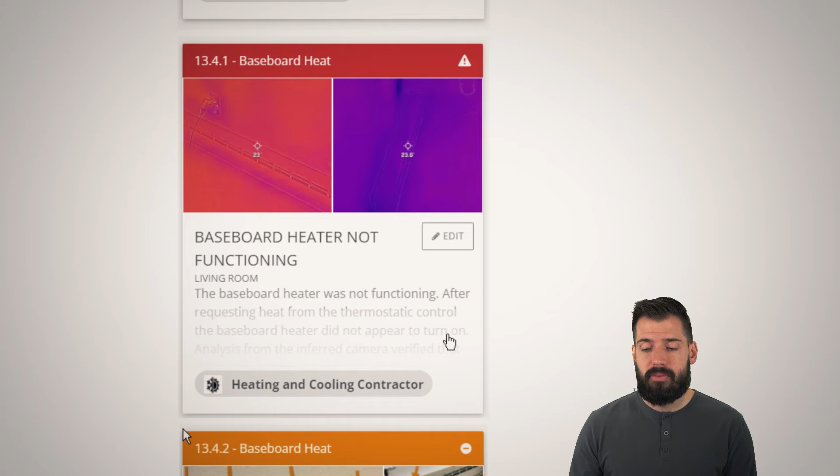Our next one, the baseboard is too hot. You can see some scorch marks right above that baseboard heat. The problem is if a drape came in contact with it, or a bed sheet, it will catch fire. Some of these also show scorching on the wall, and thankfully the wall material is strong enough that it doesn't catch fire, but that's still a risk. Once you start seeing stuff like that, it might be recommended to have somebody come out, professionally evaluate it, make sure it's heating in the right temperature range. Otherwise, get it replaced, because baseboard heaters are very inexpensive and easy to replace.

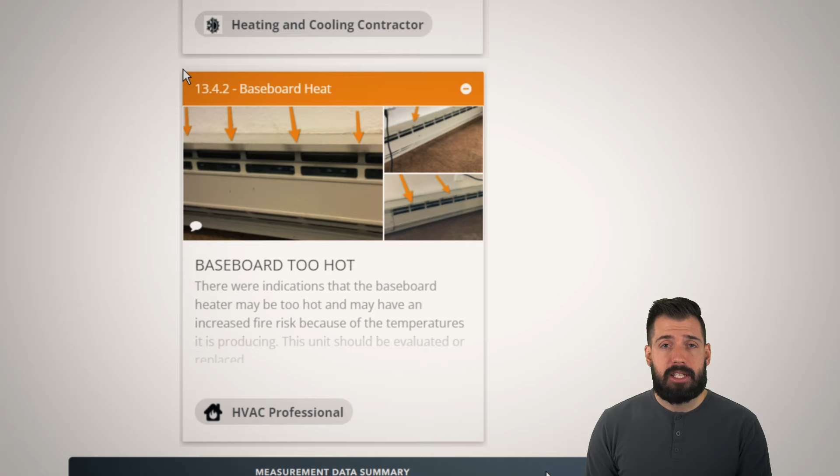The next thing is radon. Make sure you get your house tested for radon. We are in zone 1, the highest level of radon in the entire country, so I highly recommend testing. What you can see is this has an average of 17.4 picocuries per liter. Anything above 2, you should start looking into getting it repaired.

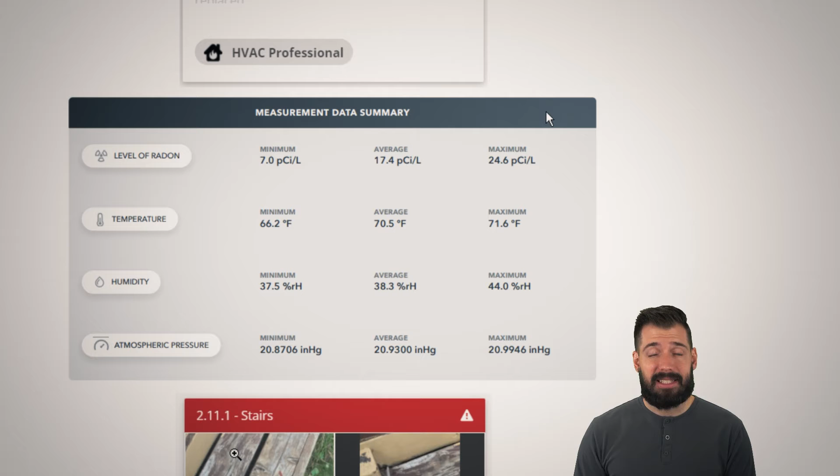Anything above 4, in a real estate transaction, the seller needs to take care of it before you take ownership of the house. This one had a minimum of 7 all the way up to 17 as the average, and then 24.6. That's insane - very, very high and definitely not ideal at all.

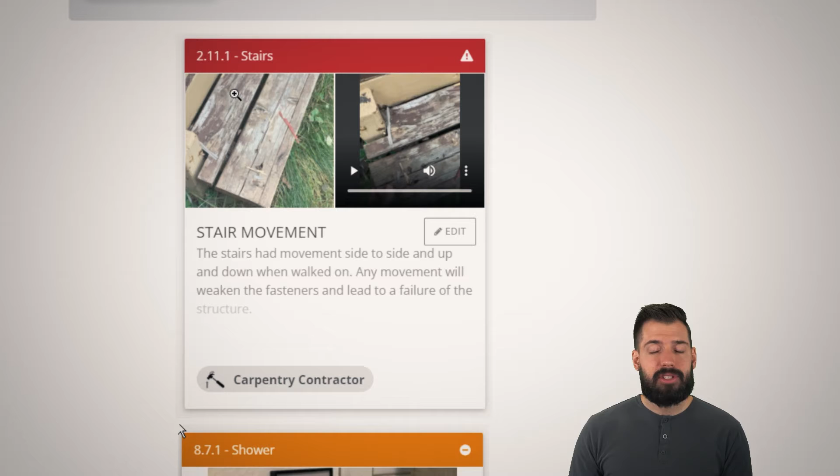So stair movement - great video here, but as you walk on the stairs they just move and do their thing. If there's any kind of movement, the fasteners, like the nails and screws, start moving, and then what they're attached into starts to wear out. Then the fasteners come out and we have some collapse possibilities, some issues.

I always love having notes from the seller - that's about as good as it gets. Hot and cold water reversed in the shower. Is that an easy fix? No, not at all. You'd have to tear out the wall and put the pipes on the opposite sides, and that's probably going to be solid copper. It's just not something that's easily fixed or replaced.

They had to put that sign there because if it's predictable, it's preventable. That means if it's predictable that somebody would go in thinking they have cold and actually put on hot, and they scald themselves or get hurt in some way, then you could find yourself liable, and we definitely don't want something like that to happen. So anyway, it's always fun when we get notes from the sellers, because I love it - they aren't trying to hide anything.

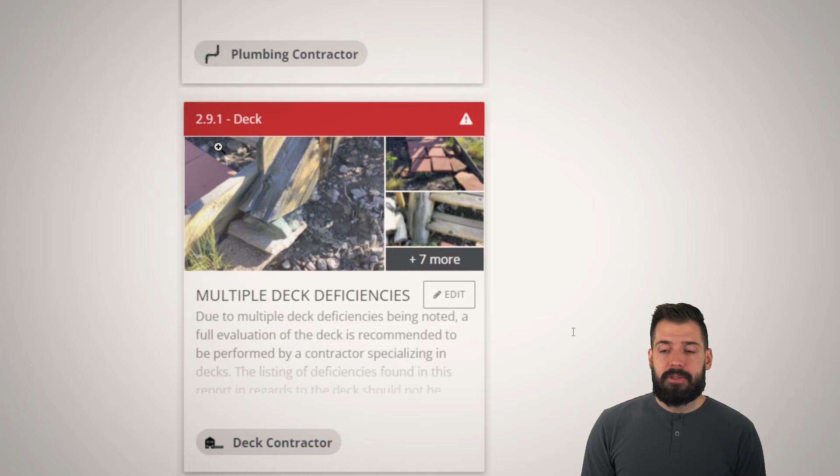They're very clear that, hey, this is an issue, and I like that. I really enjoy that level of integrity. So multiple deck deficiencies - yeah, there were some deck deficiencies here.

It's so interesting, decks are one of those things that people feel like, well, this is simple construction, this is something I could do myself. And the reality is you can't. A lot of times there are so many small details that are missed, and they just add up to have some really catastrophic type issues.

So we have inadequate anchoring on this. We have a whole bunch of issues with the stairs not being the way they should - no railings, no guardrails, no nothing. And it just compiles and compiles and compiles, and then we end up having some major issues, whether it be structural or from a safety standpoint.

And this has both. So if you are going to install pavers, let me just tell you, this is not how you install pavers. A lot of times with real estate transactions, people will do things that make the house look better than it actually is. You can see it's just done quickly. I think they went to the local hardware store, bought some pavers, threw it down so it didn't look like a whole bunch of dirt at the bottom of the stairs, but it was done incorrectly, and it shows and creates tripping hazards.

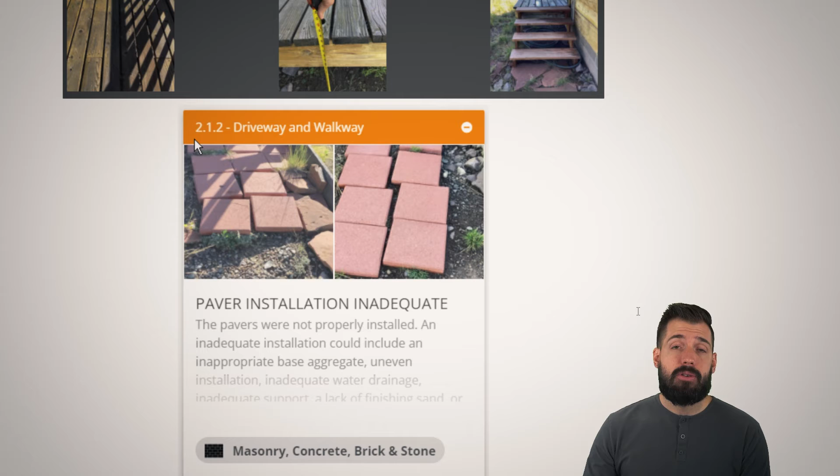So just so you're aware, the protectant is failing on this wall. And the thing about the protectant failing is, does it need a protectant? The answer is always going to be yes. This wood is an organic compound - it wants to break down, it wants to turn to dirt.

If we can put a clear coat on there or some type of stain, that would be excellent. If you want to paint the house, that's great, but paint is not going to last that long. Maybe you can get somewhere from 5 to 8 years with a stain, maybe 10 to 12 years with paint. But the problem with paint is that it doesn't last forever - you're going to have to repaint, and you've lost all of the wood grain, which makes this a beautiful house. So clear coat or some type of stain is exactly what you want, but you'll be replacing it rather frequently.

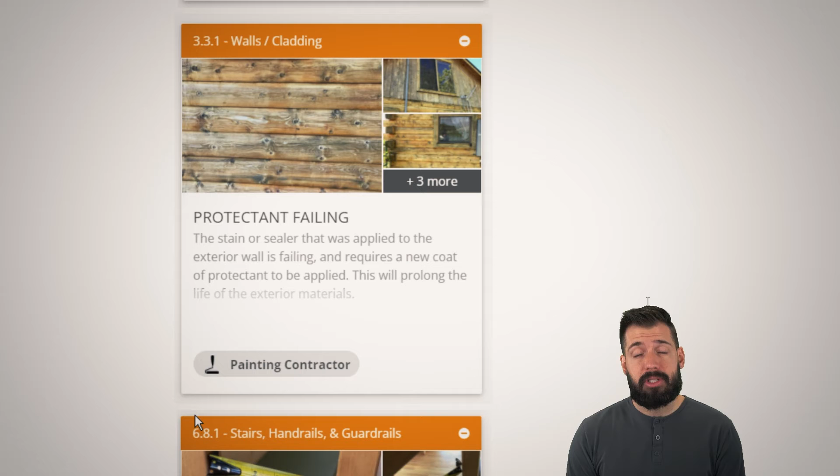Next, we have stairs where there's more than 4 inches of space between the balusters. The problem with this is you have to keep in mind, if there's a child in the house - put yourself in the mind of a 90-year-old version of yourself and a 6-year-old version of yourself, maybe even younger - if you're crawling around, is there the possibility that a baby could fall through that? And the answer is yes.

So we always want to make sure that we are being as safe as possible. The reason these standards exist is because people have gotten hurt in the past. And again, if it's predictable, it's preventable.

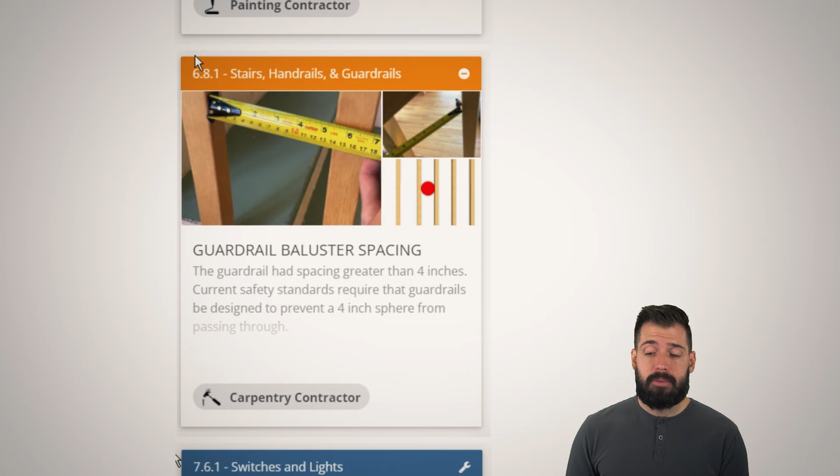Moving on, it's really interesting whenever there are light switches that are taped over, because you have to ask, why is it taped over? Is it a convenience thing, maybe they have their TV hooked into a wall outlet around the perimeter of the floor? Do they have some other device running off this, and why does this have to stay on? Is that a wiring deficiency, or is it just because they have baseboard things plugged in like computers and they don't want to accidentally flip the switch and turn off a computer, which would turn off some outlets around the bottom of the floor? Maybe that's what they have going on.

So the next thing is, this house has a 100 amp service panel. Right now, the average is about a 200 amp service, and a lot of homes are moving into 400 amp service. When you think about all the electronics we have today compared to 50, 60 years ago, there's nothing in comparison. The amount of electricity needed from the average home has just expanded crazy. So a 100 amp service really isn't enough for a 4-person family - mom, dad, parents, children - that's something we definitely want to have whenever there are 4 people in the household.

We definitely want to have 200 amps. Think of it as 50 amps per person as a safe bet. If you're a person that does a lot with electronics, there's a lot more TVs, gaming consoles, computers, tablets, then maybe you need more power. Or if you do something in your garage like welding, then yeah, you probably need more power. But whenever we see 100 amps, that's really the bare minimum of what you could possibly have and still be happy in your house as far as electricity load is concerned.

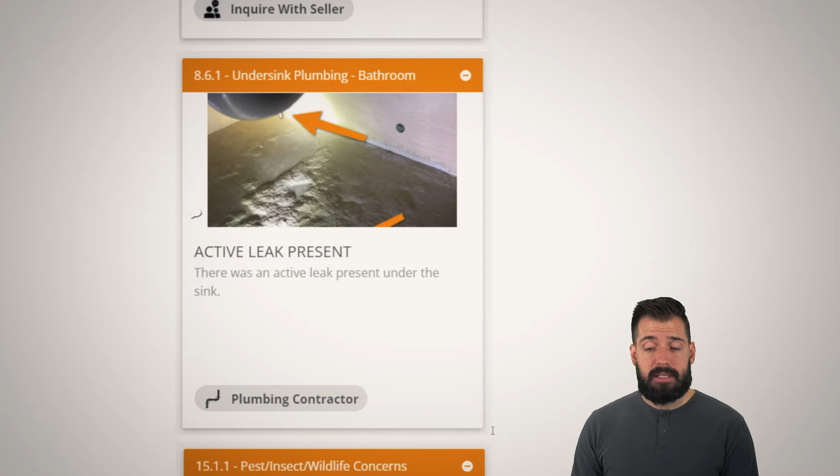So in this case, the leak is coming because there are two little things that need to be tightened, and unfortunately people don't always tighten down their plumbing the way they should. This can be tightened without any tools, just by hand. But clearly the issue is there, and either it was ignored, neglected, or they just didn't know how to fix it. But it's as simple as this: if you can tighten down the cap on a drink, then you can tighten down that.

So, rodent droppings. Whenever there are mice or other things like that, you have to keep in mind that whenever a mouse is scurrying across the ground, they are constantly dripping a little bit of urine, and that is actually how they leave a scent trail to tell them how to get back home. So anywhere there's a mouse, there's mouse urine on the floor, so that's gross. And then additionally, we have all of the rodent droppings, all the poop.

The problem with that is the rodent droppings can have a virus called hantavirus, and hantavirus has a 40% kill rate. So basically, if it's between you and 3 friends that got hantavirus, probably one of your friends is going to die. And realistically, it is a very, very dangerous thing. So if you do see rodent droppings, eliminate the mice first. Once that's taken care of, then you can clean up all the rodent droppings. Just wear a really good respirator to make sure you don't have any issues with the hantavirus.

So Federal Pacific electric panels. We've said it a million times: if you have one, get rid of it. Spend the $2,000, get a new electric panel, get something that has AFCI and GFCI. AFCI is arc fault circuit interrupter. GFCI is a ground fault circuit interrupter.

AFCI, if there is a wire that is nicked and the electricity is just arcing, then it is going to shut that off. GFCI is if I touch something and now the electricity is going through me instead of going through something else, then it'll shut off. We can have our service panels have both AFCI and GFCI, and that is ideal.

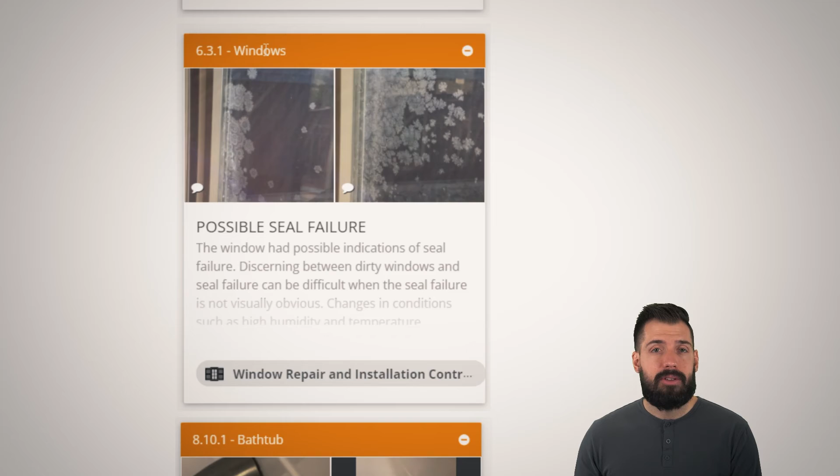Now, if air can move in and out, then so can moisture, and whenever that happens, we get something that looks just like this. And those windows functionally are not going to keep heat inside the house the way they should. Additionally, it's very difficult to look at the beautiful mountain vistas whenever you have a window that you can't even look through.

So, fill spout loose. The problem with the fill spout being loose is that you have to keep in mind that the shower or whatever is waterproof. So water comes down, hits the shower wall, and it's waterproof. Great. But in order for us to get water in there, we have to have something coming basically through the wall, so we have a pipe coming through the wall. Now we have a way for water to come down, hit the pipe, go through the wall, and now we have water in the back of the wall, which is going to create mold and a whole bunch of other issues. So what we want to do is just seal right above there and make sure we don't have any water going there.

Now, one of the things you want to keep in mind is that you don't want to necessarily seal all the way around. You might want to just seal 90% and leave an opening at the bottom. The reason why is if water does get behind there, maybe we still want that water to come out instead of being trapped. So something to think about there.

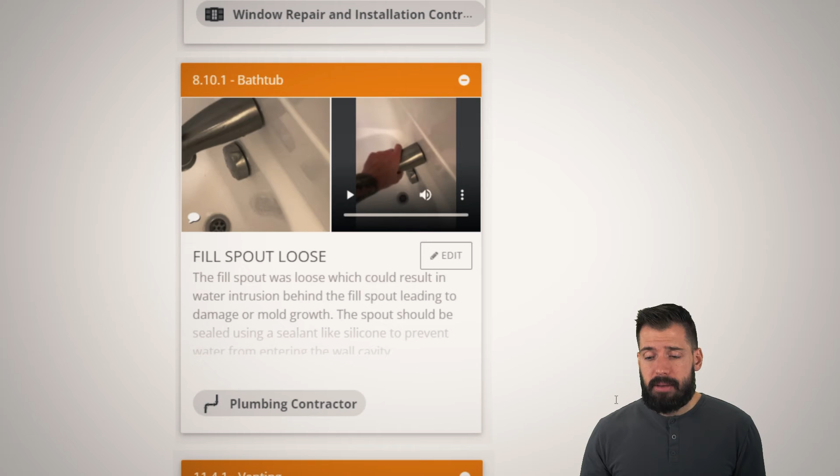Then we have the flue vent taped here. The problem with this being taped is that that's incorrect. Additionally, why is it being taped? Could that be a combustible material? Maybe, maybe not. But the real thing is that if it needs to be taped, then you're using the wrong type of ductwork. That's a good way to think about it.

Or does that mean that maybe it was too long of a run, they had something clogging it, and they were getting backdrafts, or they were getting some kind of gases, carbon monoxide, or byproducts of the combustion process coming back into the house? Or is it that it's so corroded because of incomplete combustion that they then taped it up so they could hide it from us? There's a lot of reasons why people do the things that they do.

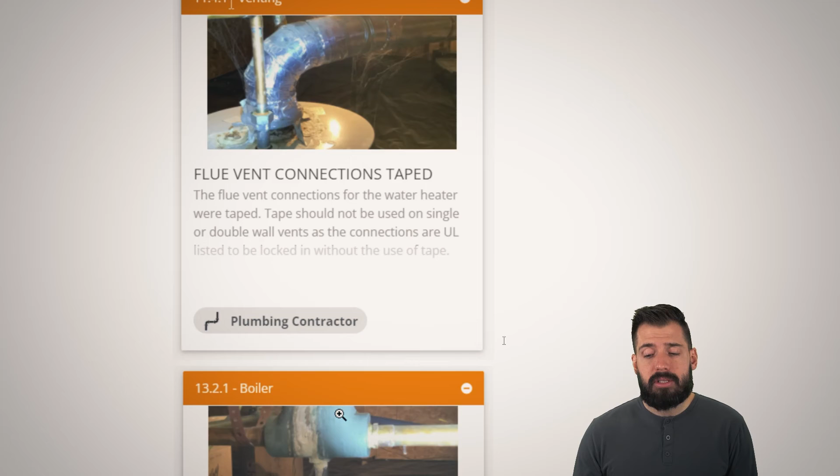So this right here, there's some valve corrosion. What really happened here, if you take a look, is that for a boiler, as water comes through, there's basically like a scrubber, a mesh, and water will come through, and any little air bubbles are going to hit into this mesh and then come up to the top. Then this valve here allows air to be released, but doesn't allow water to be released. So then to get rid of air bubbles, as water passes past this, it is then going to scrub out the air bubbles and release it.

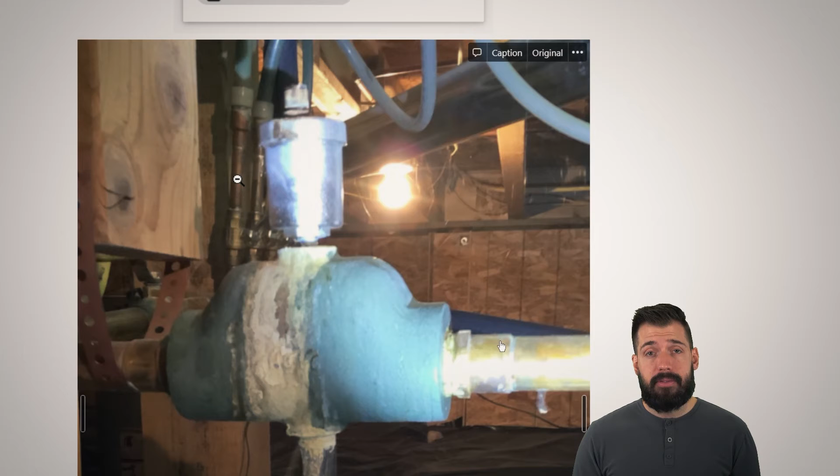Now, if that valve has failed or gone bad, then you start to see something just like this. All they should have to do is replace the valve at the top. It's a relatively easy thing, except this system is under pressure, so we have to relieve the pressure before we're able to work on it. And sometimes that is above the abilities of a novice homeowner.

So then we have gutters and downspouts that are clogged. We want that water to go all the way away from the house. A lot of times we will have chipmunks and other rodents that will fill up those pipes with nesting material, and then your drains from your gutters are completely useless. Absolutely 100% completely useless. So we want to clean that out, get that taken care of.

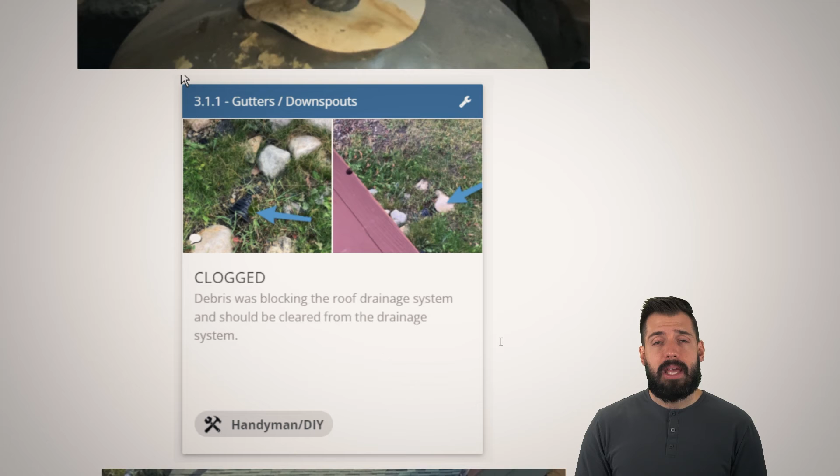Additionally, in our area, in a high alpine environment, if your house is using heat tape to melt that snow and ice off, then you want that heat tape to go all the way down and all the way out, maybe even extend a foot or two outside of this pipe to make sure that any water that goes down that gutter has a clear path to get out of there. Otherwise, the freeze-thaw is going to expand and it's going to break that pipe. When we take a look here, it looks like we have some heat tape doing what it does, and that goes to show that this particular house has heat tape.

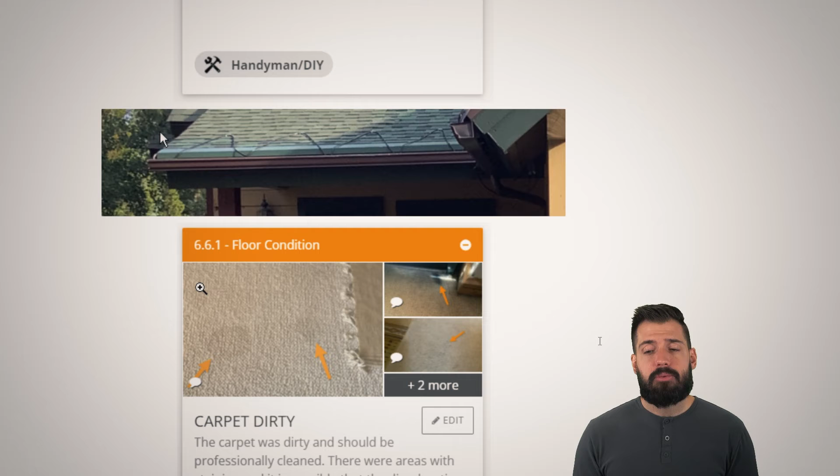So we need to have heat tape going down the gutters.

So the carpet is dirty. Yeah, that's a thing, who cares? Well, if you're buying the house sight unseen, you've never seen it, and you don't know if the carpet's dirty. I guarantee you all those beautiful realtor photos showing the best angles aren't showing you the dirty stained carpets. And if they are, they're upping the exposure so everything looks blown out, white, and extra clean, and that might not be the case. If you have certain allergies or other issues, you might have to replace the entire carpet, and that's obviously an expense.

So we want you to be aware of some of the expenses that exist. Weather stripping damage - remember we talked about mice scurrying across the floor, leaving little droplets of urine so they know how to get back to where they came from? Well, how do you think they get into the house? Whenever there are gaps between the garage door and the ground, or gaps between doors, you need to watch some YouTube videos to see what a mouse can squeeze through. It's so impressive - mice can come in through that type of opening. If you can see daylight, you can see a mouse. It's as simple as that.

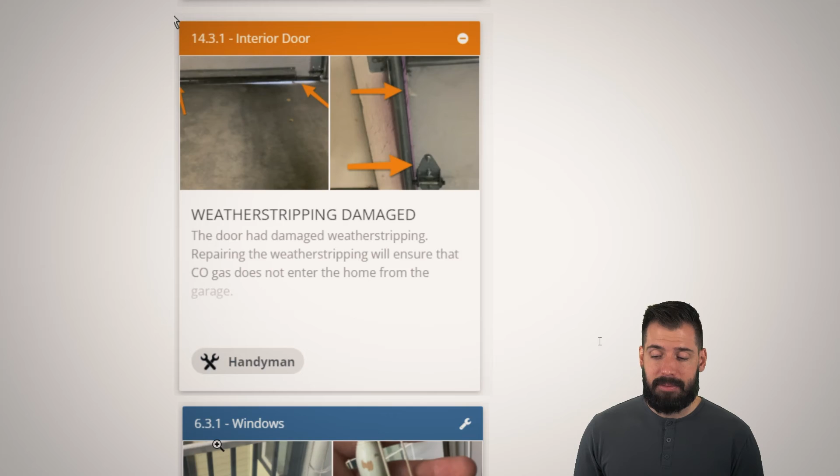All right, blinds are damaged. Sometimes the blinds match all the other blinds in the house or room, and that means just because one blind is damaged, you might actually have to replace multiple blinds - 4, 5, even 10 blinds. If that's the case, to make everything match, it becomes a huge expense.

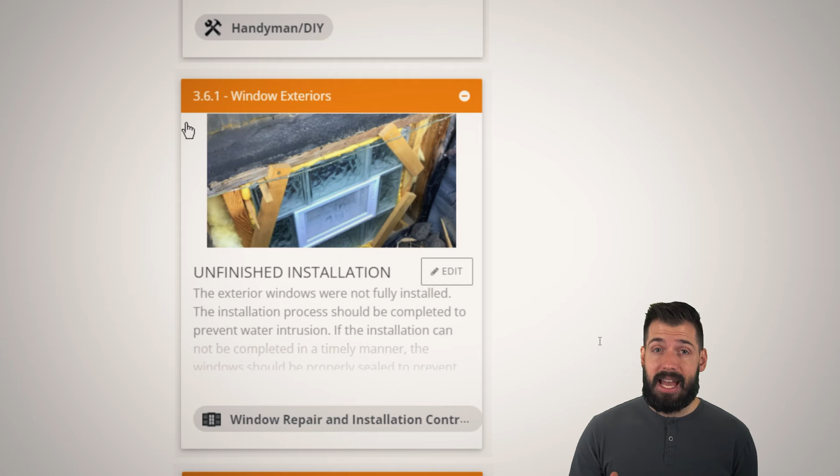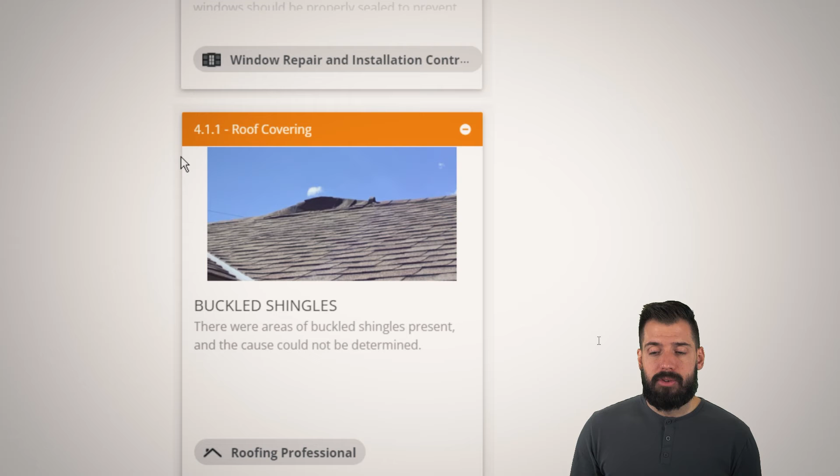So these shingles here, they're done. This could have been from high wind or a whole bunch of other things, but I believe it was high wind, and it just started to rip the shingles off the roof. The shingles were improperly installed to begin with, and that led to issues like this.

All right, installation inadequate. If you take a look here, you have to think of the outside of your house as a rain jacket. And if you just had a big hole right here exposing the studs to rain and other elements, then of course the rain jacket isn't going to do its job at all. Any hole, any issue needs to be taken care of and resolved. In this particular case, it's just poor craftsmanship, and you wouldn't believe how much we end up seeing something like that.

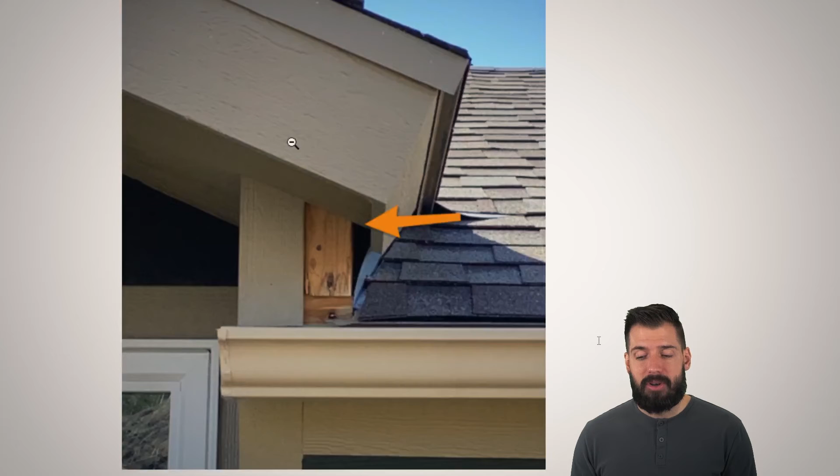So here's a close-up picture right here. If you were a bird making a nest, a squirrel, a chipmunk, even raccoons can fit inside of there - you just found yourself a beautiful, nice home. And if you're a rain droplet, you're probably going to go inside the house as well. You can see some of the water staining on that 2x4 stud, so there's already been moisture-related issues with this - less than ideal.

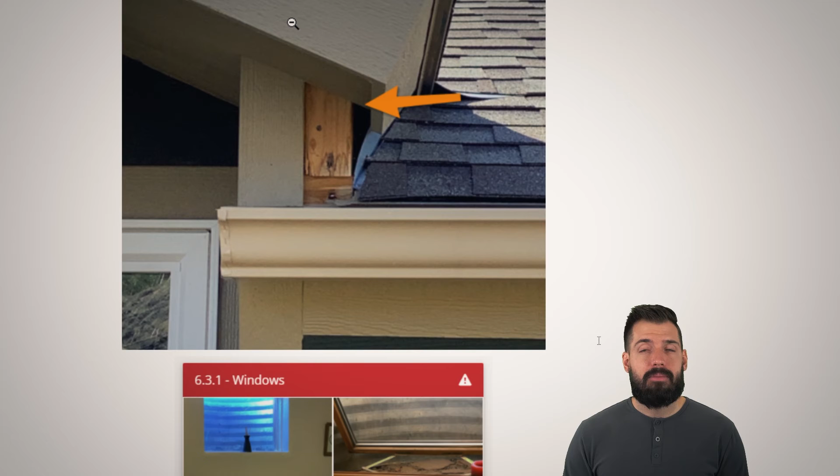All right, here's the thing - I'm not going to get on a soapbox, I promise, I'm going to try really hard not to. But here's what really upsets me: you call it a bedroom, and therefore it needs to have egress, yet you have an egress window that is completely inadequate. Not only is this window too high off the ground, but whenever you open it, there's no way even a child could fit out of that window, because you can't open it any further than it shows.

In addition to not being able to open the window any further, even if you could, you have the metal actuation arms that do this type of maneuver, and they would prevent you from getting out. There's just no safe way to exit from this area. If there was a fire, heaven forbid, this would probably be a room that would claim a life, because not only can you not jump up into that window, but if you can't get out, what are you going to do? Break the window, and then you're going to have bloody hands, arms, and legs, which could be just as dangerous as the fire itself. So something to be mindful of.

The dryer vent termination, not good. You just do not want a dryer vent terminating inside the house. The reason why is because all that moisture on your clothes doesn't just disappear, it goes somewhere. Where does it go? It goes to this vent right here. This vent only catches the lint, it doesn't do anything other than that. So all of that humidity and moisture goes into your house. Now think about how wet your clothes are. Would you ever take your clothes that wet and put them inside a closet? No. Why not? Because it would create mold.

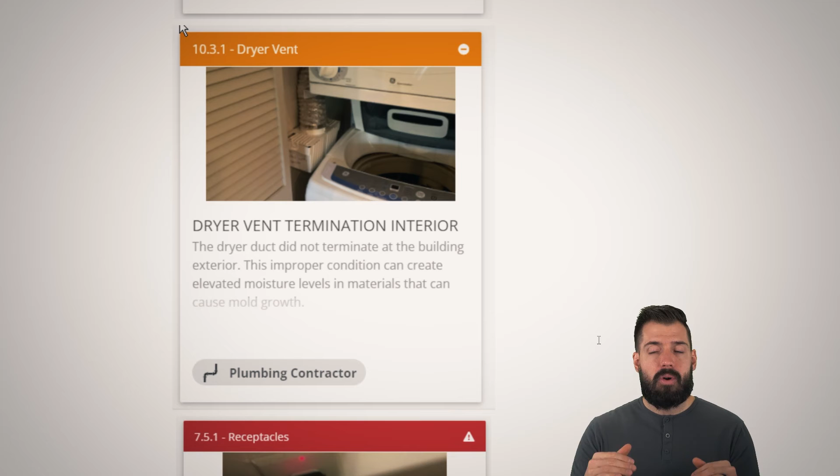That's obviously a very bad thing, especially for people with sensitivities to mold. If you would never take a pile of wet clothes and put it inside a closet, why would you do this? You wouldn't. What they need to do is install a condensing dryer. A condensing dryer, basically just like a dehumidifier, will take all of that moisture and turn it into water that it then drains out. That's what you're looking for.

So, GFCI protection not installed. Again, ground fault circuit interrupter - if I touch something and the electricity comes through me onto the ground, that is bad, but the GFCI should protect me so that I get hurt but not killed. So really any flat surface, anywhere that a liquid could be spilled and come in contact with an electrical device, needs GFCI protection, which in today's standards means basically every single outlet in the house should be GFCI protected. But we're really going to be sticklers about areas like the kitchen, laundry room, and bathroom.

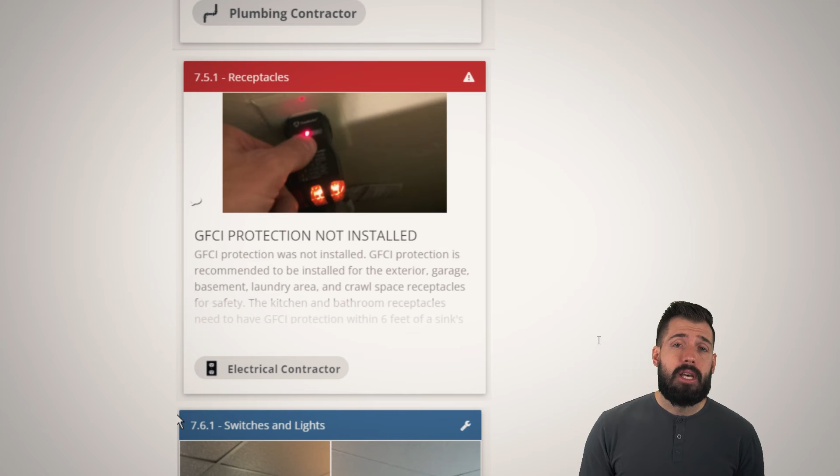Moving on, we have dark rooms. This is something that Shay really points out a lot, and I really appreciate it. The reason he points out these dark rooms is because they were installed with no overhead lighting - you'd just need some type of lamp or something like that. Sometimes that can be challenging because maybe the way you want to set up the room, you can't have a lamp, or you can't have as many lamps as you want, or it just doesn't work. So it's good to know that these rooms might need additional lighting.

Now, with this particular drop ceiling, you should be able to install some can lights relatively easily. But it's just one of those things that if you're buying the home, you need to know that if you're going to make this room the way you want, you either need to invest in some lamps or invest in some lights, because this room is not ready to be lived in just yet.

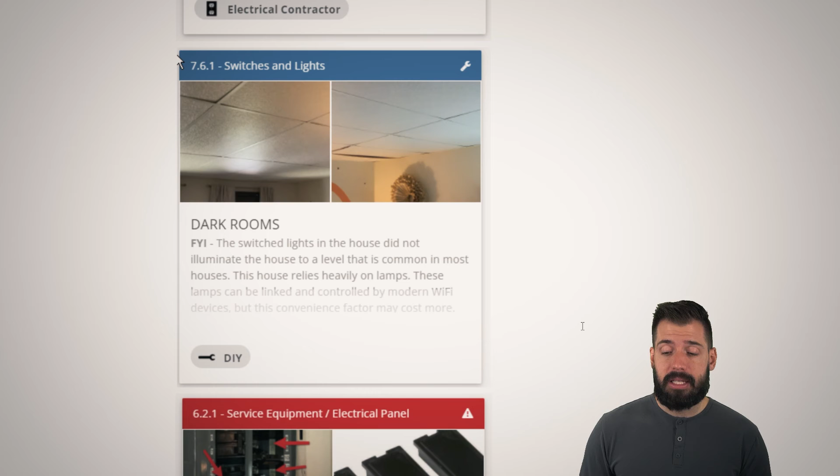All right, we have open breaker slots in the panel. If you can put your finger inside and touch the bus bar - the shiny silver part near the center - by putting your hands into those holes, well, then you're out of luck. That will kill you, and there's no GFCI protection or anything that will be able to help you in that case.

Additionally, on one side you can see that breaker, instead of being put in perfectly, is now sliding down because those filler plates, in addition to preventing you from putting your fingers in there and getting electrocuted, also make sure that all of the circuits stay where they need to be.

So what's wrong if you have a circuit breaker that is like this? Well, the problem is that instead of having a really tight connection, you now have a loose connection, and that can create some arcing back and forth, which creates heat, which then can create a fire. Not a great thing.

This one made me chuckle. I'm pretty sure what they did was cover over top of the vent. There's a vent that allows hot air to come out, and I think they covered it with duct tape. Not the best thing to do. Please don't repair appliances with duct tape. There is an appropriate way to repair it, and if not, just replace it. I no longer think this is able to operate the way it was intended. Here's a nice little close-up of that duct tape.

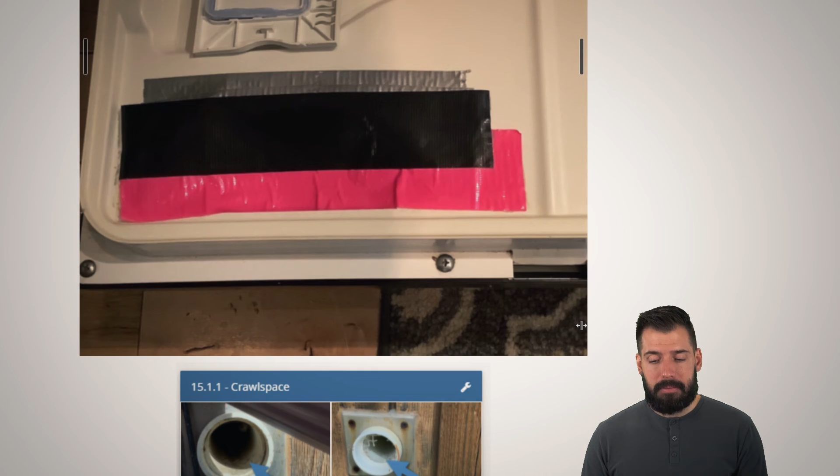All right, so we have screens. What happens with these screens is that you can see in this picture the screen is actually corroded away, and that is a thing that will happen. We need screens on our vents because birds and other animals, insects, whatever, can get inside of those vents. If they get inside, they can clog the vents. If they clog the vents, depending on what the vent is used for, best case it just won't work the way it's supposed to. Worst case, it'll create a backdraft situation where we've filled up our house with dangerous carbon monoxide, which could put our family at risk of death. So we want to make sure we have appropriate covers on these things.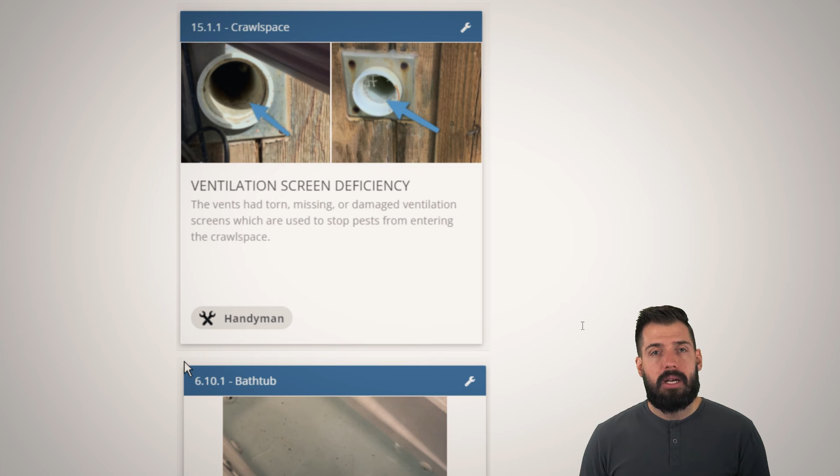Now, one of the things, like a dryer, you don't want to put a mesh screen over top of because it'll catch lint and then clog itself. That needs to be able to breathe a little bit more. So there are cages that go over top of it. Instead of just a vent that covers here, there's a cage that will allow the lint to go where it needs to go, but still prevent chipmunks, mice, and other things like that from getting in there.

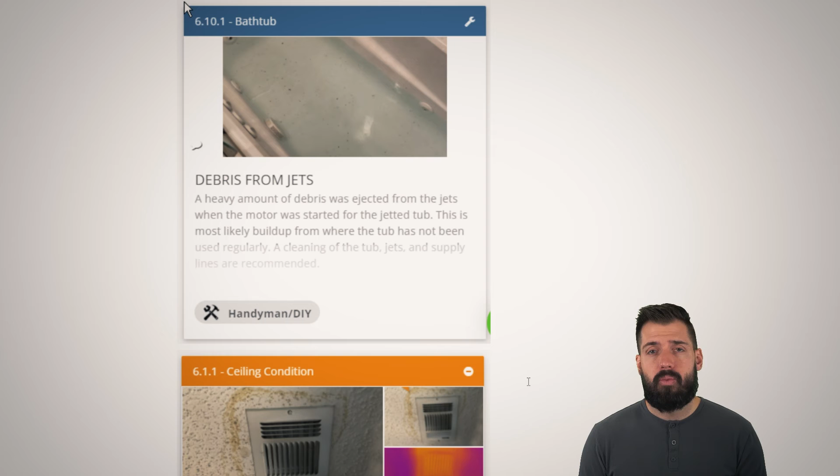So, all right, this jetted bathtub had a whole bunch of debris inside of the jets. That's pretty common and normal. You just want to make sure that once a month you are running your jets, making sure there's nothing in there that shouldn't be. Sometimes, depending on where you live, you might even have insects like spiders making homes inside of your jets. So it's a good idea to run them regularly to make sure you aren't getting buildups of water, scale, soap scum, and other things inside the jets. Especially if you're going to take a bath. If you take a bath, you need to run the jets. If you're just taking a shower, you do not need to run the jets.

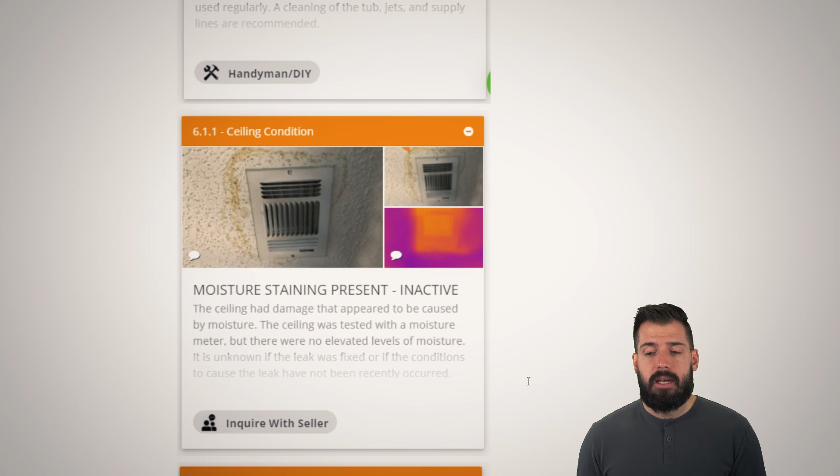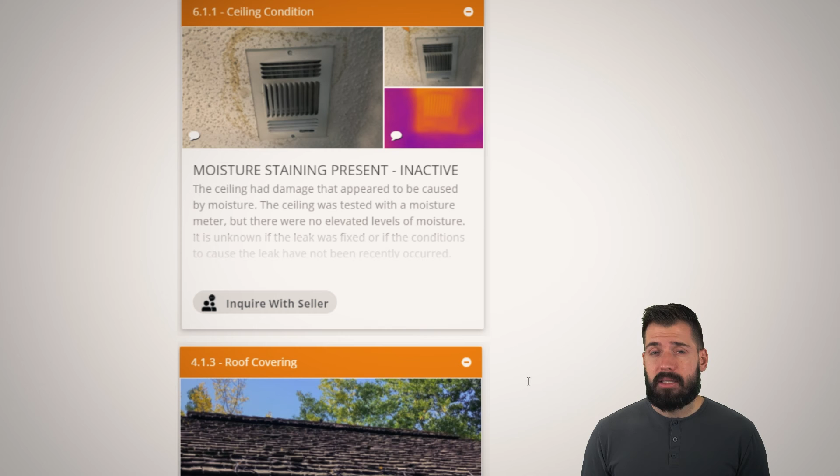So, moisture staining present and inactive. What caused this staining? Is it that we had a whole bunch of hot, humid air coming through here on a cold surface and it created condensation? Maybe. Is it that there was a leak from up above? Probably. But unfortunately, the moisture meter did not detect any additional moisture in that area, and the thermal camera also didn't see anything standing out. So the real question is, when did this happen and why did this happen? And is it going to happen again, or did somebody repair it? That's a very important thing to keep in mind.

All right, wooden shingles, shakes, shingles, depending on how the shingle was made. Most of these houses that have this, it is a huge safety issue. Imagine that we have a wildfire and an ember comes floating over, and that ember lands on top of that wooden roof. That wooden roof is going to catch on fire. If you really love the look of a wooden roof, modern wooden shingles will actually have a fire retardant impregnated inside of the wood, so the wood is not going to catch on fire. That's really what you're looking for. Ideally, you would have wood shingles impregnated with a fire retardant to make them safe. They will last a very long time, and some people really like the look.

There are better, more modern materials, but if that is the look and style you want, just know that there is a modern, safe version of this. Just keep that in mind.

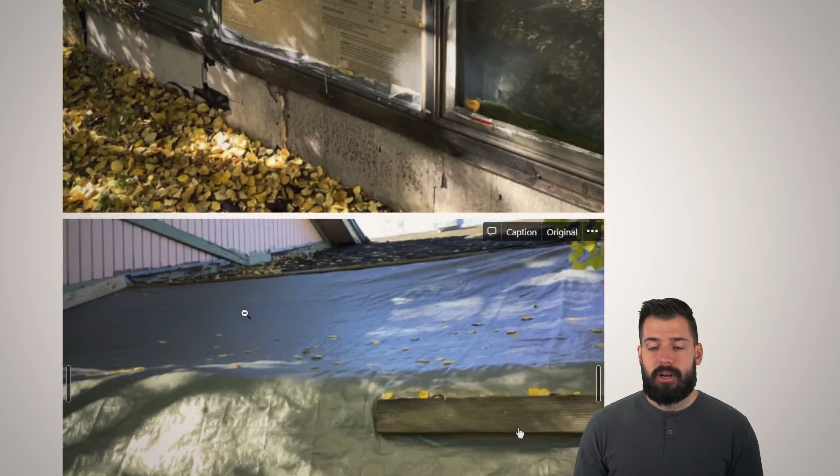So multiple window concerns, there were definitely some multiple window concerns. First off, you can see this tarp is being used, but the way it was installed shows a lack of understanding of how rainwater rolls down things. The window is also missing, so I think it was broken out, and they put some insulation there to temporarily take care of it. Then you see here we have a tarp, and the way they installed it, just terrible, absolutely terrible. So that water is still going to be coming in.

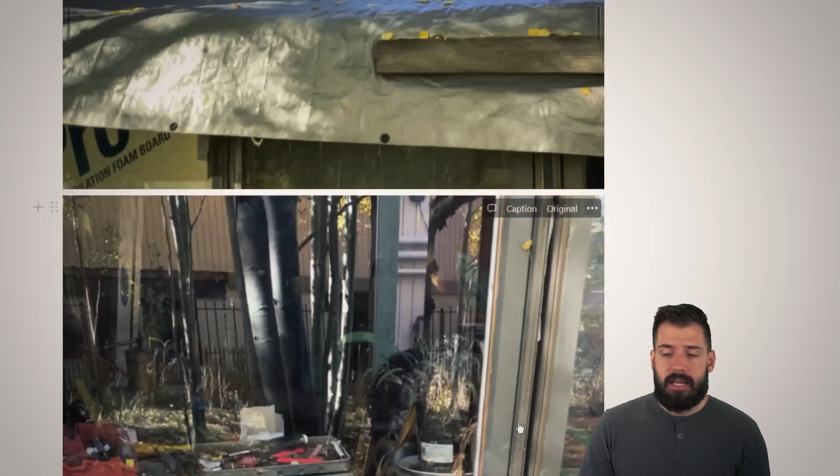Here's another broken window, and you can also see a bit of a settlement crack right down at the footwall of the foundation. Lots of things going on right there. I think all those windows are going to need to be replaced, and I'd also love to have a structural engineer come take a look, because you see the way this is just broken off right here. We have a broken window. Did somebody hit the window? Did something hit it? Or is the issue really more involved with the fact that there's a little settlement in that area, and did that cause the window to break? If that's the case, we definitely want to talk to somebody.

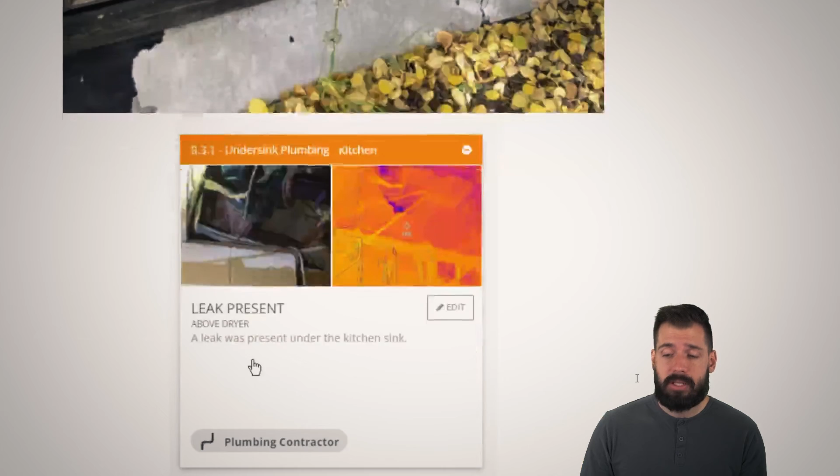Leak present. Above the dryer, there was a leak underneath the kitchen sink, and that's just a bad thing, basically. Thank you, thermal camera, for finding those things, because sometimes you cannot see it.

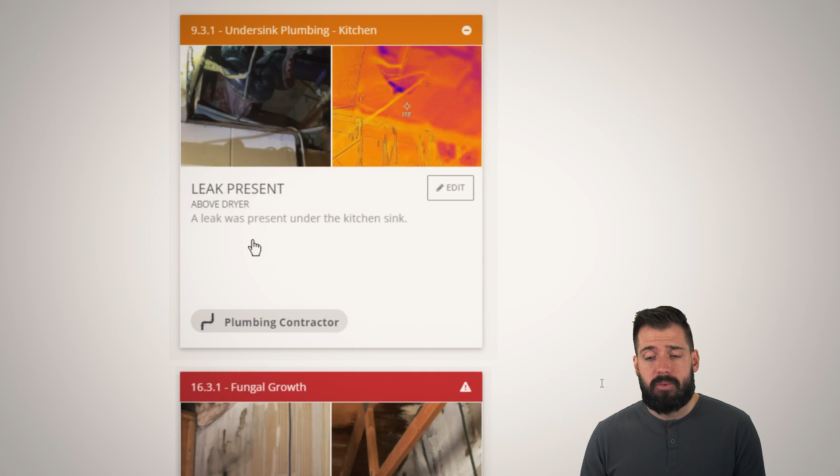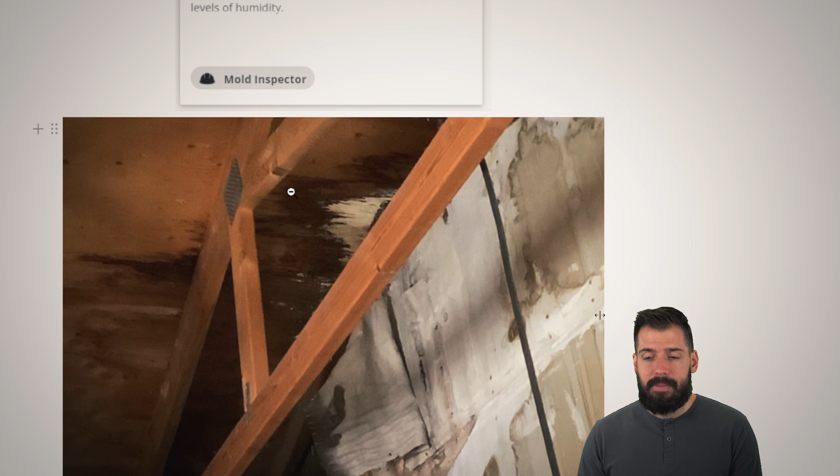Just like right here, it's kind of hard to see, but with the thermal camera it pops out really well. We definitely want to fix any kind of leak so we don't get fungal growth. Is this mold? Yeah, probably, 100% yes. If you take a look, all this white stuff here, all the black stuff over here, then we have the poor drywall that is totally decayed. All of that is really a big health hazard, and you want that taken care of as much as possible.

Urine smell present. There are certain things that my nose can no longer smell, but I will tell you, whenever I walk into a house that has pet urine, oh my goodness, it's like being punched right in the face. And golly, some of these houses are terrible, this one included.

Then there's moisture staining present. Wood is one of those materials that never forgets, which means if you want to know if this is an ongoing issue, you can take a pencil and outline where the water has gone to. If next year it's right at that pencil mark, great, the issue clearly is no longer a problem. But if the water staining has grown and pushed more of those minerals out of the wood, well, that's obviously a really big deal, and you want to get that taken care of, resolved, whatever it may be.

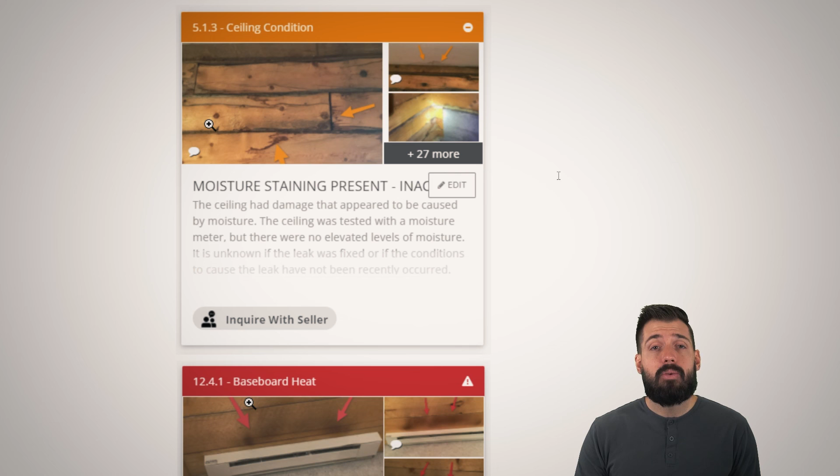Remember earlier we were talking about these baseboard heaters. Well, this baseboard heater is scorching the wood around it. That is a fire safety hazard. We really want to make sure we are not catching our houses on fire with our baseboard electric heat. There is nothing around it that is combustible except for the wood it's attached to. So it's a big safety concern.

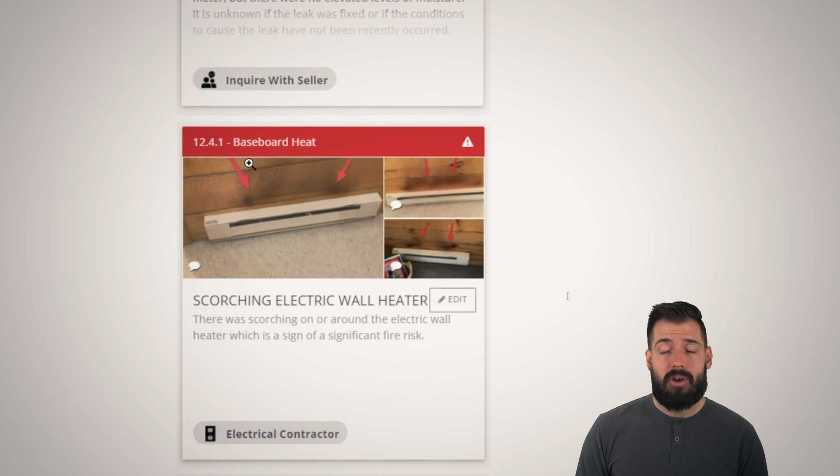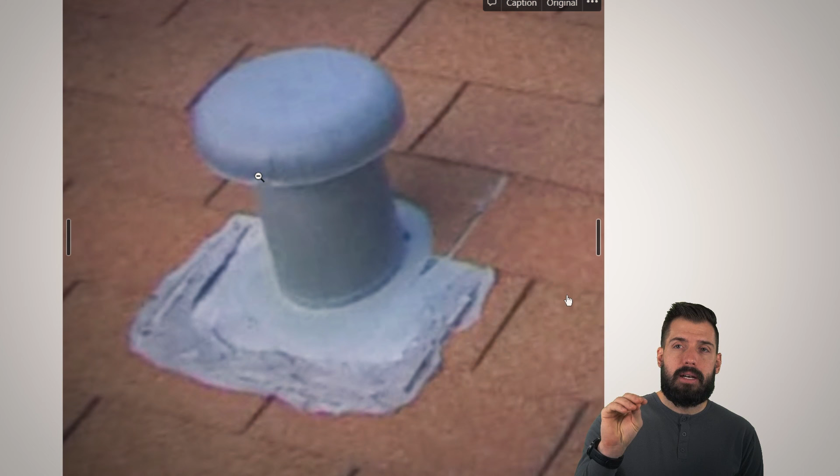Multiple areas of damage on the roof, prior repairs, and so on. Remember we were talking about the water inside a shower, how it comes out of that fill spout, and how we only want to caulk around about 90% of it. Same thing here. This is the wrong place to be putting any kind of sealant.

What happens is the water is going to be coming down the roof, and if it gets trapped behind here, we want it to be able to escape. Unfortunately, because they put this gray sealant on there, as the water comes down it gets trapped. It fills up with water until it goes into here, and then it comes into the house. So whoever installed this did it completely incorrectly.

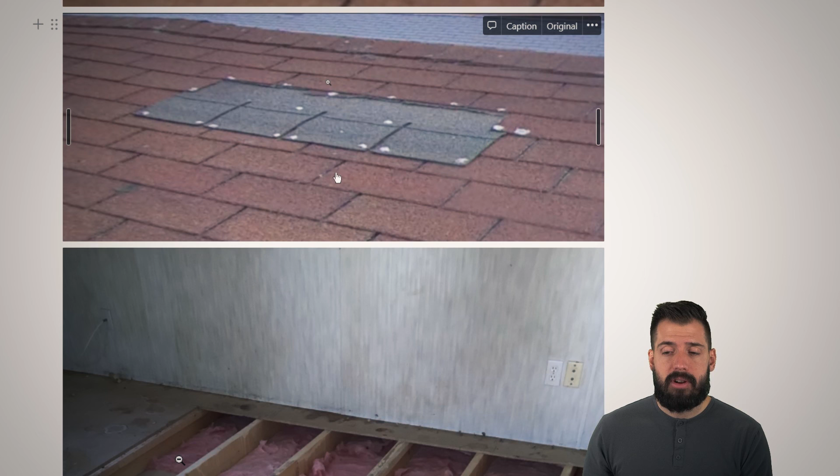Same thing here. Really bad job putting these shingles on here. Very, very bad job. That's not even how you're supposed to use those shingles, like where the shingles should overlap versus what they did. They used an entire sheet, just totally incorrect.

All right, so the last thing I'll end on is this right here. This is basically an area where, unfortunately, a person had passed away inside of this house, and we weren't notified by the listing agent or the buyer's agent. Hopefully it was disclosed. It was a neighbor telling us a person had passed away. Having worked in law enforcement for a long time, I'll tell you that whenever somebody is there for a long period of time without being discovered, unfortunately this is the aftermath, because as things break down, things can be stained, damaged, whatever. The smell in this area was extreme.

We'll just get that picture out of there.

But basically, what I'm saying is whenever you have a house and somebody has passed away inside, there's a potential that it's no big deal. Like, for instance, if somebody is on hospice care with a nurse round the clock watching them, and that person passes away, and then there's time for family to come and grieve, then it's not a big deal. That is a completely natural thing.

I have a hereditary trait. It's called death, and I believe everybody else I know has the same thing. I do not know a human that has lived forever. So the thing is, we all die. It's a very natural part of life. And whenever a person is taken to their burial site or cremated, or taken to the funeral home, then really there's nothing wrong with buying a house where somebody has passed away.